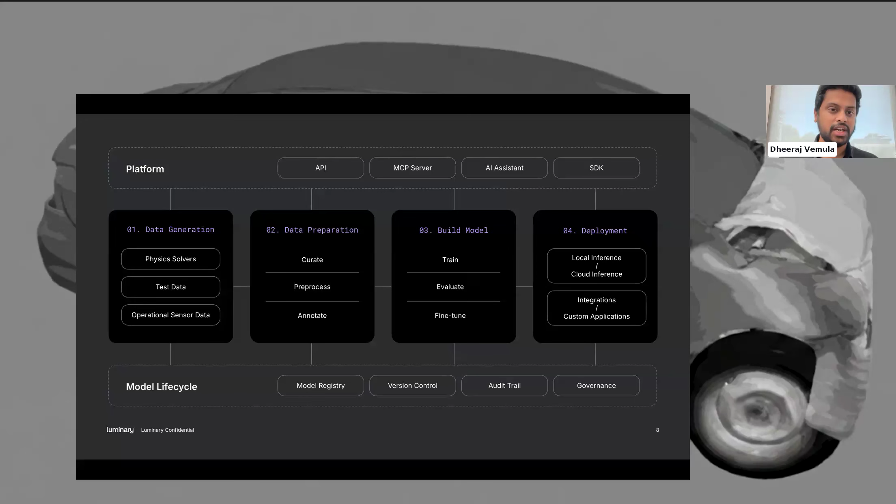So a complete platform that takes physics AI into production, not just a one-off bunch of different scripts tied together, but something that's production grade and ready for your enterprise. With that, I hope you have a good picture of who Luminary is. And now I'll hand it over to Riddhiman to talk about Shift Crash.

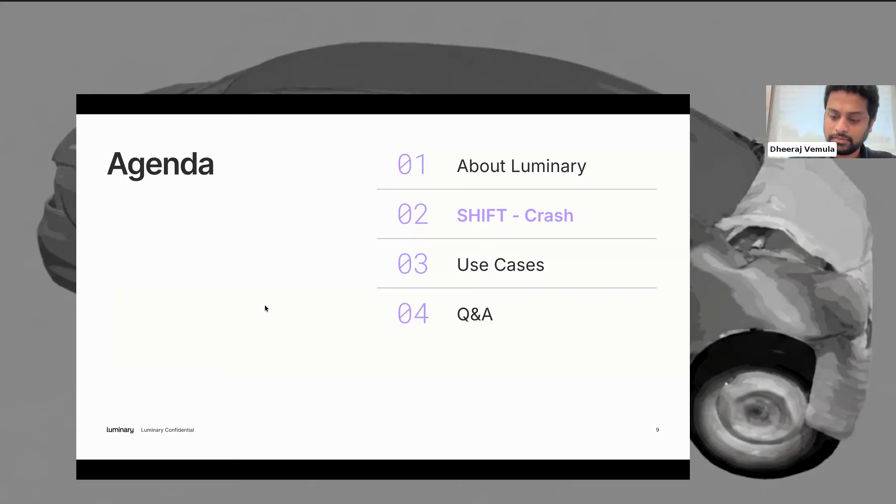All right. So let's dive right into it. We're going to talk about what went into developing this model, what went into developing the data set, and what you would expect to see out of a model like this, the use cases, and so on and so forth. All right, so let's get started.

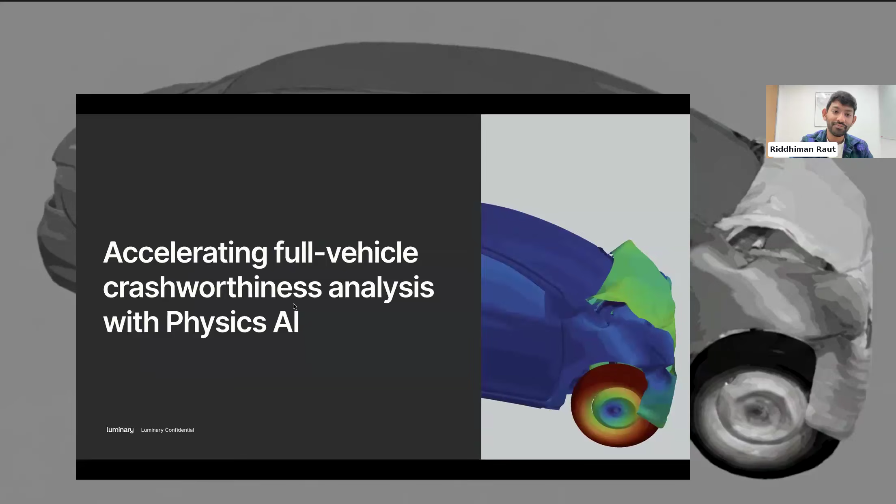So one of the sticking points why we decided to pick up this problem is that crash simulations are expensive across the board, right? Whether you're doing simulations for full vehicles or if you're doing tests, it's a lot of time, it's a lot of compute, it's a lot of money. A single full vehicle crash simulation can take anywhere from around 10 to 12 hours on an HPC cluster. And it's not always just about the runtime itself, right?

It's about a designer or an engineer submitting a job and the job stays in queue for a few days. So by the time you actually get to those results, it might take you 3, 4 days or maybe even a week, right? So speed is of the essence when you are designing a new vehicle for a new vehicle program, for example, and you want feedback for your what if scenarios. What if I make an adjustment here? What if I change the shape of the rails? And if you have to wait a week or even a few days for that feedback, you're losing a lot of time as well as engineer hours.

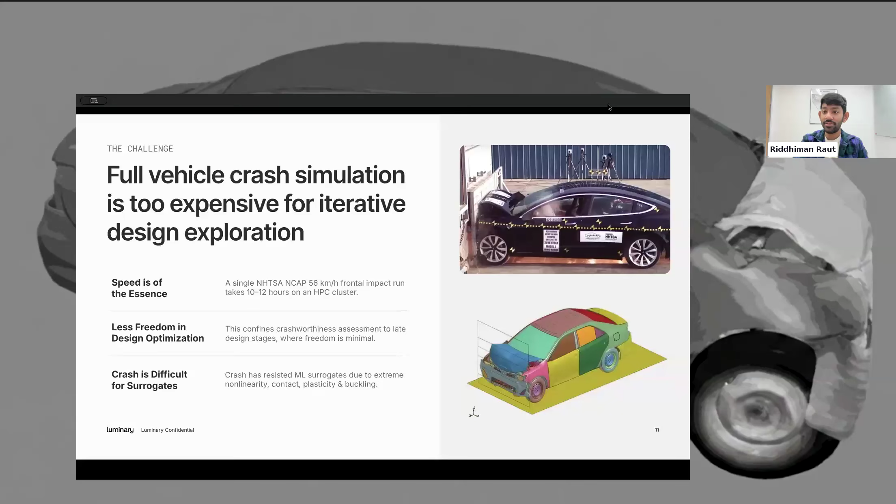This also ties into the fact that once you have made certain changes to your design, you have these design decisions locked in because of the amount of time and expense it takes to compute these. So you have a lot of constraints in your design space. You have less freedom, and finally, when we talk about physics AI at large, we see a lot of applications in external CFD in smoother distributions. Crash is something that is less seen in the literature because of its highly nonlinear and highly localized behavior. And so we wanted to tackle this problem from a nonlinear FEA perspective as well.

So what we have contributed to this body of work is twofold. First, we have provided the largest available crash data set out there. So we have around 5,000 simulations of parameterized geometries, the base model of which is the 2010 Toyota Yaris. And we are looking only at a full frontal crash at 56 kilometers per hour or 35 miles per hour, which is the NHTSA NCAP standardized full frontal crash test format.

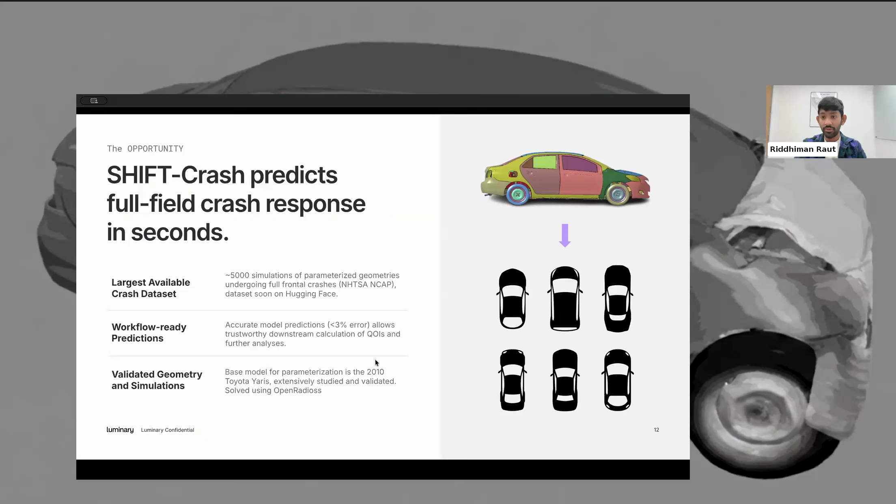The model predictions are workflow ready, and what I mean by that is that the model predictions are accurate enough to treat it as you would treat a simulation output. So if you want to do downstream calculations on top of the model predictions, if you want to do your QOIs and other analysis, you are set for that. And finally, we are using the Toyota Yaris geometry, which is one of the most validated and extensively studied geometries out there. So it gives us a lot of confidence, and we are coming from a position of strength in terms of both the data set and the model.

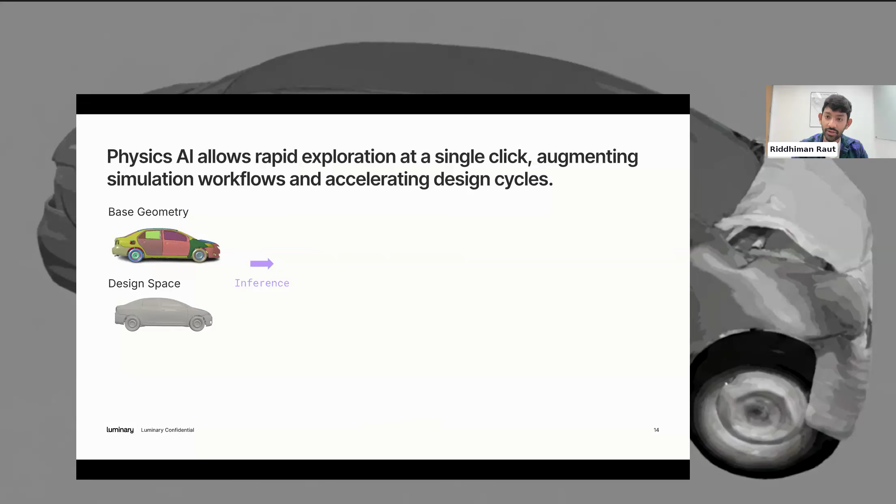So in a physics AI workflow, you would probably be looking at a workflow like this. You will have a base geometry, which in our case is the Toyota Yaris. You would create a parameterized design space out of it by changing, say, some material parameters or some design parameters. And once you click on the inference button for the model, you would ideally expect a full field transient behavior of the car to see how it deforms.

You would also see the von Mises stresses to see how the loads are being transferred over the entire body of the car. And finally, you would want to analyze and generate your own quantities of interest or QOIs. We have looked at firewall intrusion, acceleration, delta V in our case, but you can use your own quantities of interest as you would like.

So the way we look at physics AI is, it's not to replace simulations, but to augment your simulation workflows. So physics AI gives us the opportunity to explore thousands and thousands of designs, thousands and thousands of what if scenarios, and you would be able to down select. You would be able to rank and filter by your quantities of interest.

And once you have a good candidate pool, you now submit your full high fidelity simulations to validate your physics AI predictions. So what this is basically doing is de-risking your actual simulation runs, giving you more bang for money for your compute and for your time.

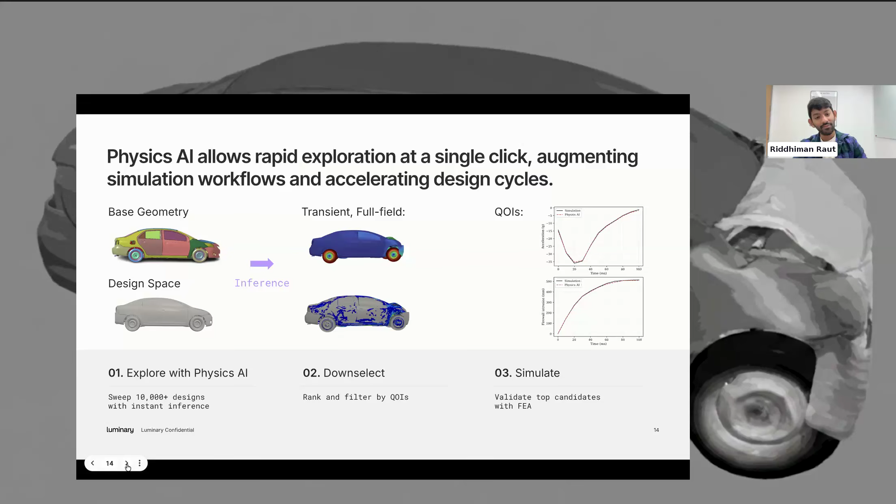So let's talk about the geometry parameterization in this case. We're looking at 4 geometric parameters and 2 thickness and material parameters. The reason for doing this is we want to show that our model responds to changes in materials, changes in sheet metal thickness, but also it generalizes to different kinds of changes in the geometry itself.

So for geometry, we are looking at changing the front crush zone, which absorbs the most amount of energy in a frontal crash, the cabin length, which directly affects the passenger survival, the roof height, which changes how the loads are being transferred onto the passenger cage, as well as the car width, which changes the center of mass.

For thickness, we are changing the thickness of the front rail, which is the most energy absorbing part of the front area of the car during a frontal crash, as well as the material of the front rails, we're going all the way from mild steel to dual phase 600.

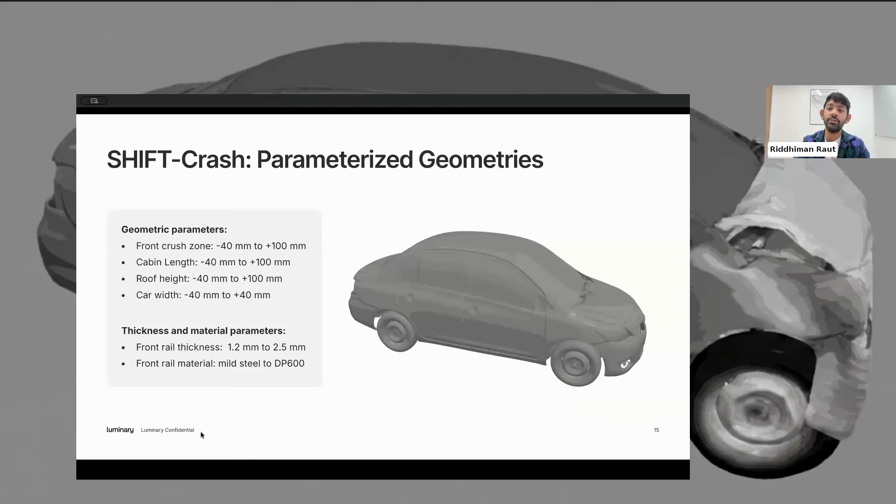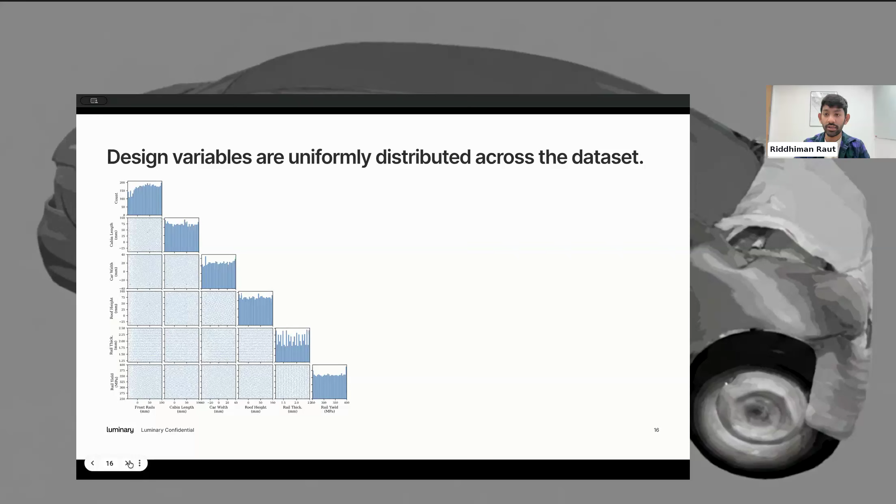The design variables are uniformly distributed across the entirety of the data set. And this is a sanity check for everyone, right? We don't want the design variables to be stuck in a certain corner of the sampling space. We want the variables to be uniformly distributed so that the model learns uniformly and there is no bias involved. The Pearson correlation also shows that changing one variable does not change the other ones, so they are actually independent of one another.

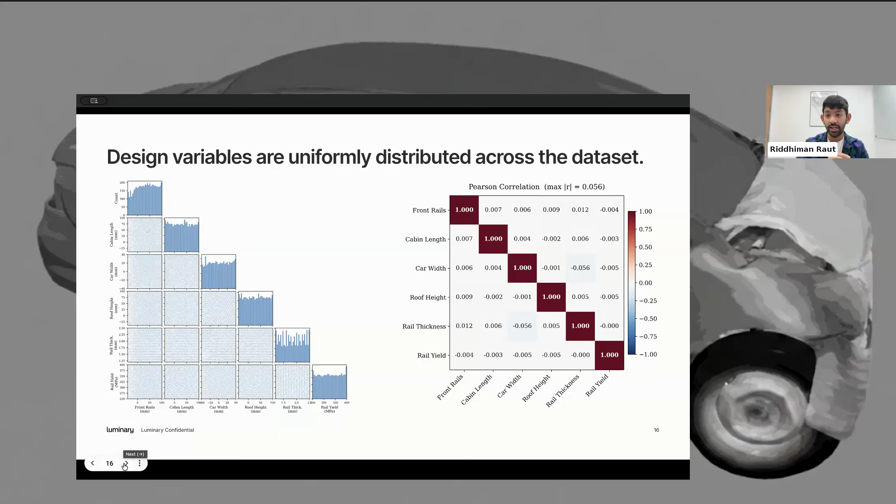The end-to-end workflow for training is something that's pretty standard. So we have 6 design variables, and we have generated about 5,000 variants from that. All simulations are run using OpenRadioss, while the parameterizations were done in ANSA. The simulation time is about 120 milliseconds, which gives us 13 frames at 10 milliseconds each. As discussed earlier, we're looking at 56 kilometers per hour for a full frontal crash.

So once we clean our data set, the outputs are the deformed positions of the car over time, as well as the von Mises stresses. The model is trained using our own version of GeoTransolver. It's pretty lightweight. It fits on one H100. It even fits on one NVIDIA T4.

The model is trained using 1,000 cases, not the entire 5,000 cases of our dataset, but 1,000 cases which are also selected uniformly from the dataset. And this is trained using DDP across 8 GPUs here over 72 hours.

Inference is pretty cheap as well. On an NVIDIA T4, it takes about 50 seconds for the entire temporal output of the model. We are predicting deformation and von Mises stresses, and quantities of interest like firewall intrusion, deceleration, delta V. These are all calculated from the model predictions themselves.

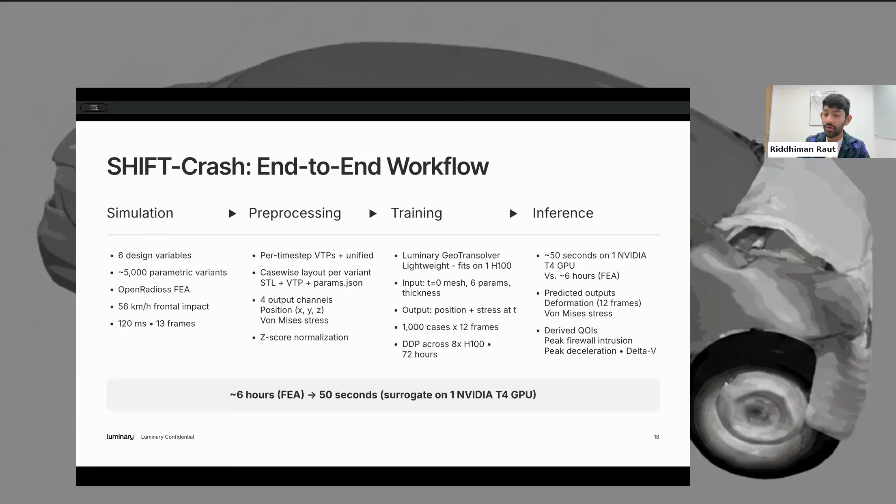All right, enough about the setup. Let's now dive into the exciting part, which is the results. So here's a case that the model has not seen at all before. On the left, you can see the ground truth simulation output from OpenRadioss, and on the right is the model predictions. You can see that they're virtually indistinguishable.

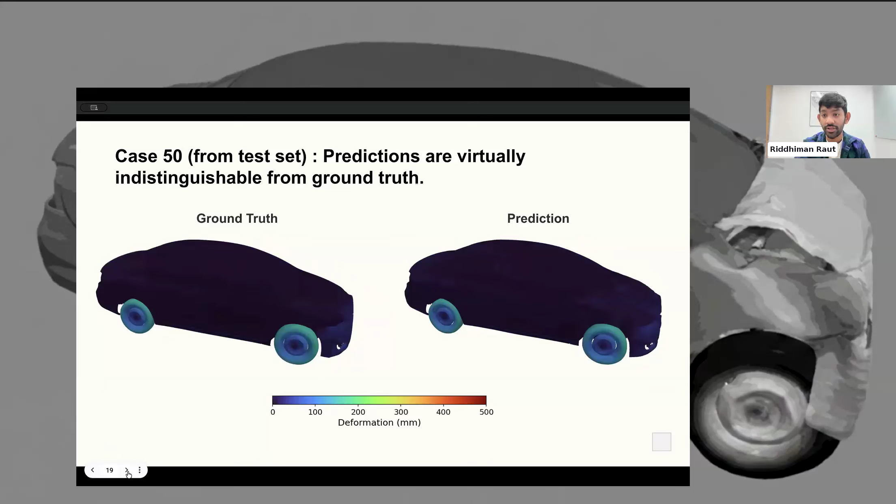And it's not just the outer shell of the car that's deforming, but if you look at the front window, which is getting a little pushed forward, and there's a seat behind, which is also lurching forward. So this is not just the outer shell, but it's the entire car system which is going through deformation and temporal changes, right? And this is exactly what we want to see, right? How the components inside the car are moving around, how the engine is moving around, so if there is any intrusion, it should also happen inside the car as well.

And not just deformations, but we're also predicting the von Mises stress here, where you can see how the loads are being transferred onto the top of the passenger cage. On the right side, we have the error plots. Since most of the behavior is happening in front of the car, we also expect our errors to be accumulated in the front of the car.

The good thing here is that our errors are about 10 to 20 millimeters even in the front, which is quite comparable to our element size of the model, which is about 12 to 16 millimeters. So the model predictions are trustworthy enough.

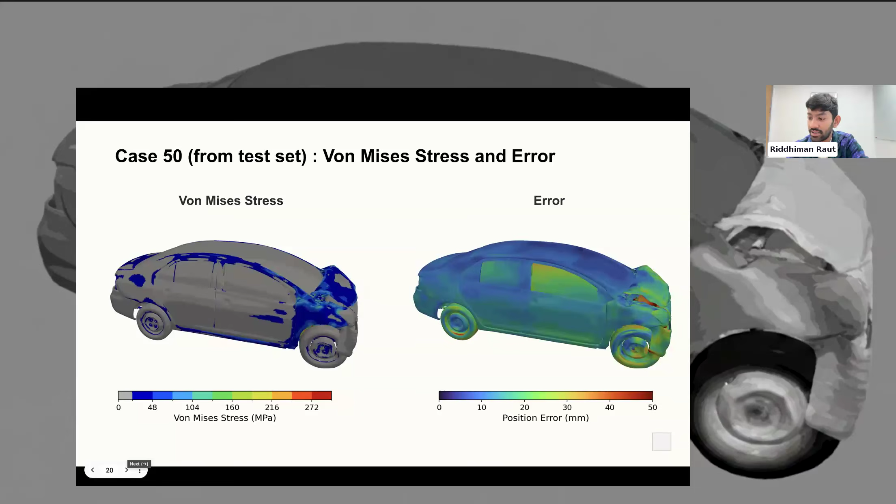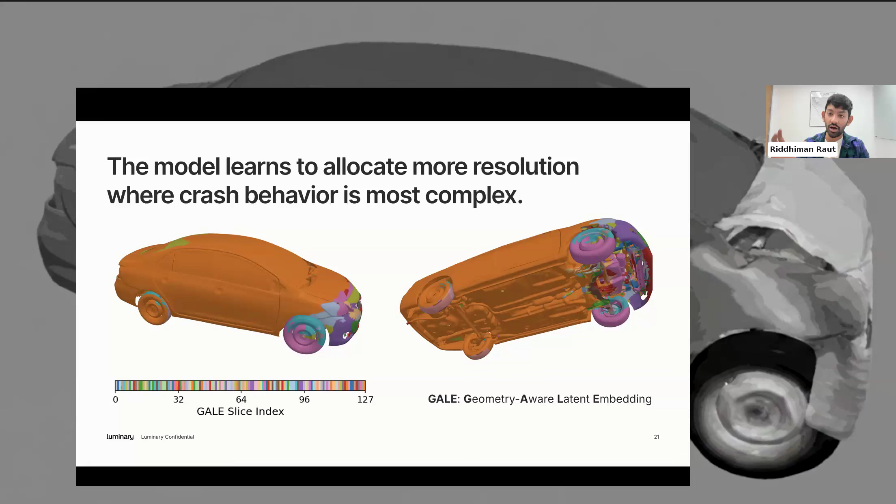I mentioned the model's behavior being trustworthy, and what I mean by that is that we have insights into why the model is learning the things that it is learning. So just to give a brief overview, the model learns to assign slices or point clouds to different regions of a geometry depending on its behavior. So in a frontal crash, we would expect most of the car to not be deformed, right? The back of the car should not be deformed, and this gets one big orange slice.

However, most of the behavior is happening in the front, and there are different modes of crashes, different modes of failure, and the model is learning that by assigning these individual color blobs to different regions of the front of the car. And it's not just the frontal bumper, but also, as you can see on the underside of the car, it's different components inside the car that are getting this specialized treatment.

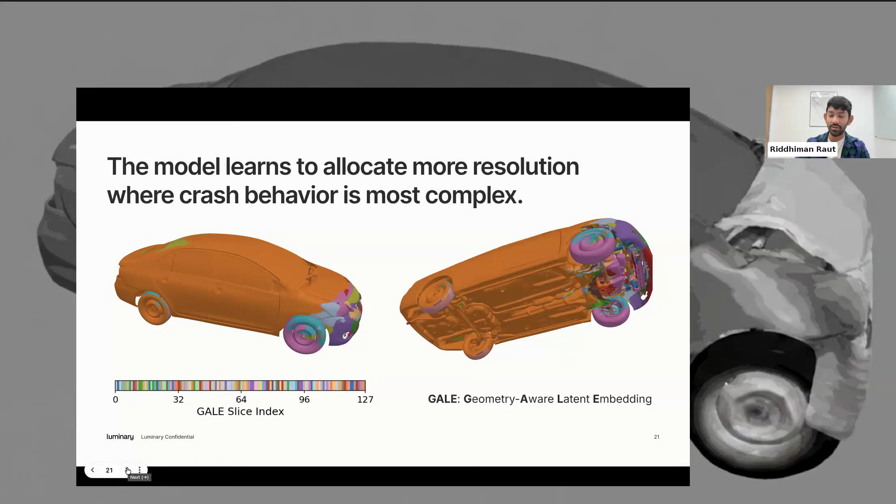And that is how the model is learning the different crash responses without any sort of manual tagging from our side at the component level. The model is learning all of this on its own, and this allows us to trust the model's prediction as something beyond just a random guess.

So now that we have seen the full field behavior, let's talk about the quantities of interest which are calculated directly from the model predictions. So here we are looking at the peak deceleration across three different cases. So the first case is an all min geometry case. So, short front rails, thin rails, low yield strength material. You would definitely expect a more severe crash to happen in this case, and that's also shown in the model, shown in the graph here.

You have the lowest peak acceleration or the highest peak deceleration, which is a proxy for crash severity, and it's also a proxy for head injury criteria. You can see that the peak deceleration calculated from the model is almost a direct overlap of the ones calculated from the simulation data. And across all test cases, we capture it within 3% of simulation data. So we feel pretty good about the model's overall predicting capability.

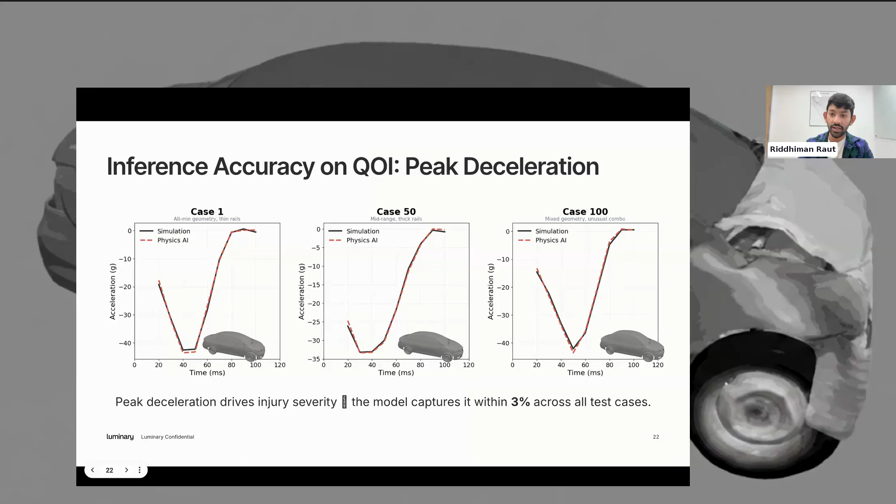You can see that for the other two cases as well, which is a mid-range case and a mixed case, the prediction data is almost on top of the simulation data.

Next up is firewall intrusion. Firewall intrusion, of course, determines the driver's survival when he's sitting in the driver's cage. During a crash event, the engine is going to move in and it's going to intrude through the firewall, and we need to understand how much this intrusion is. For our all min case, actually for all of our cases, you can see that the trend is being captured by the model really, really well. The simulation output is almost completely superimposed by the physics AI output.

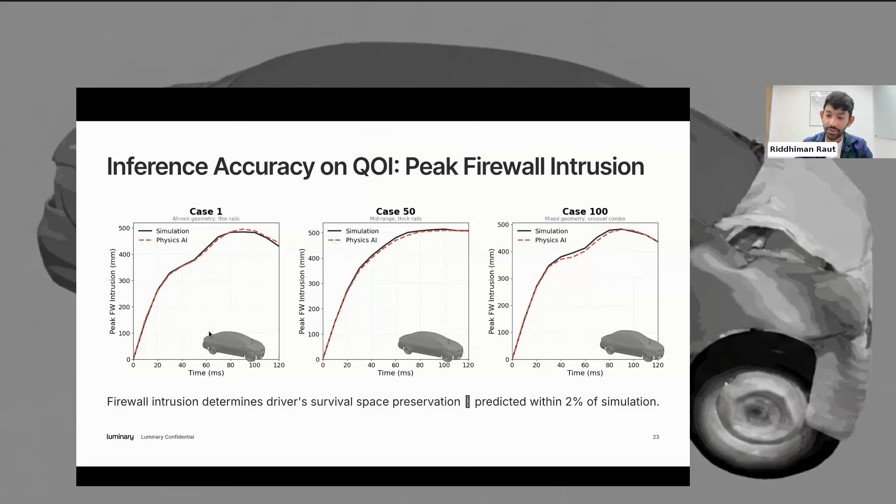And finally, we have delta V. So since crash is a rebound event, when the car is rebounding from the wall, if it has a higher velocity, it means that it has undergone a more severe crash, right? So once again, in the first case, you would expect a higher delta V to account for the severity of crash. You can see that's the case here, and also the model captures the trends across all three cases really well. Throughout our test cases, it calculates delta V within 2% error for all test cases.

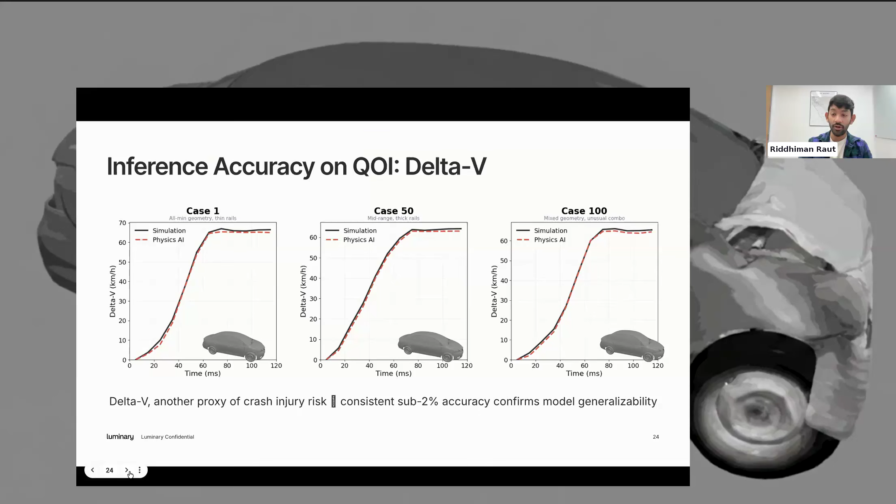And we always get asked this question, how much data is enough data? This really depends on your application, right? If you want a really, really accurate model, then you probably want to feed more data to the model. But if you want directional accuracy, you can get away with a lot less than that, right? And we did this study.

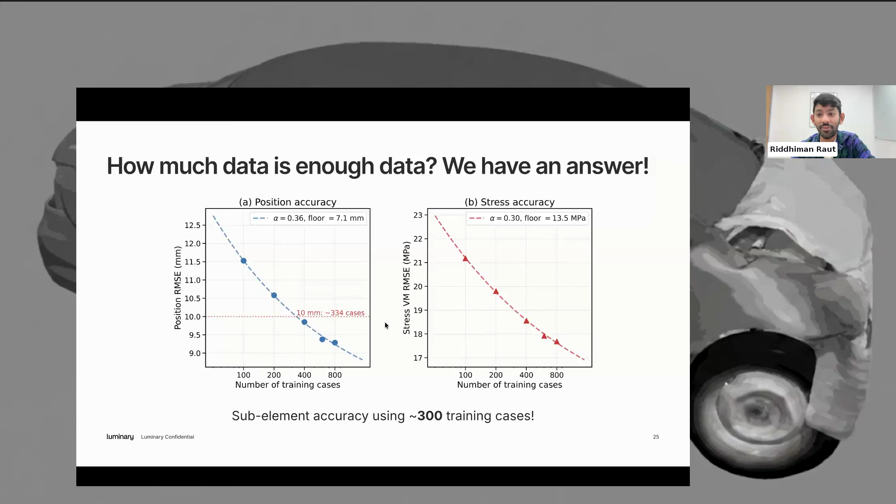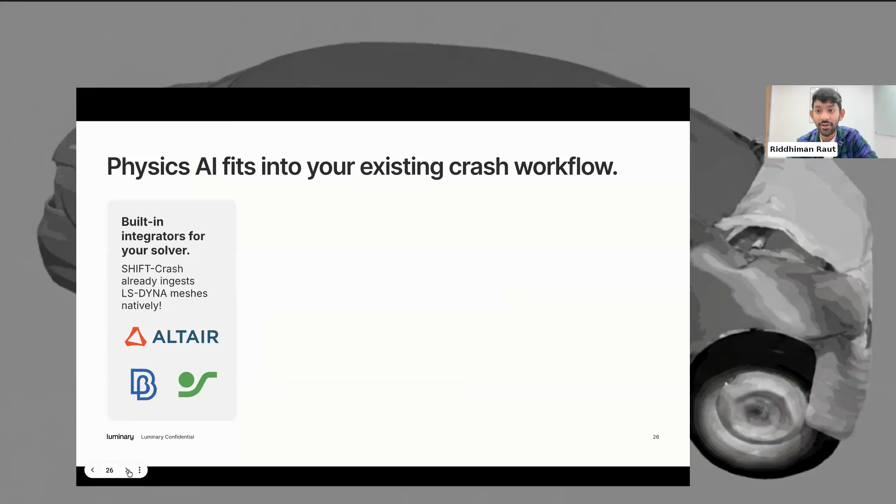So throughout this entire exercise, we have shown that we are able to plug into your workflow pretty seamlessly. If you have LS-DYNA data, if you have Radioss data, or meshes from ANSA, we're able to make use of that right off the bat. We have connectors developed. We're able to ingest that data, train our models on top of it, and there's a lot of scope for improvement of these models as well, right? We want to add dummies into the model to understand head injury criteria, to do seatbelt modeling, airbag modeling, and all of those kinds of things.

We are able to deploy anywhere, as Dheeraj has previously mentioned. We are able to deploy on the cloud, on your private cloud, on-prem, anywhere that you would want to have this capability, and your data does not need to leave your system ever.

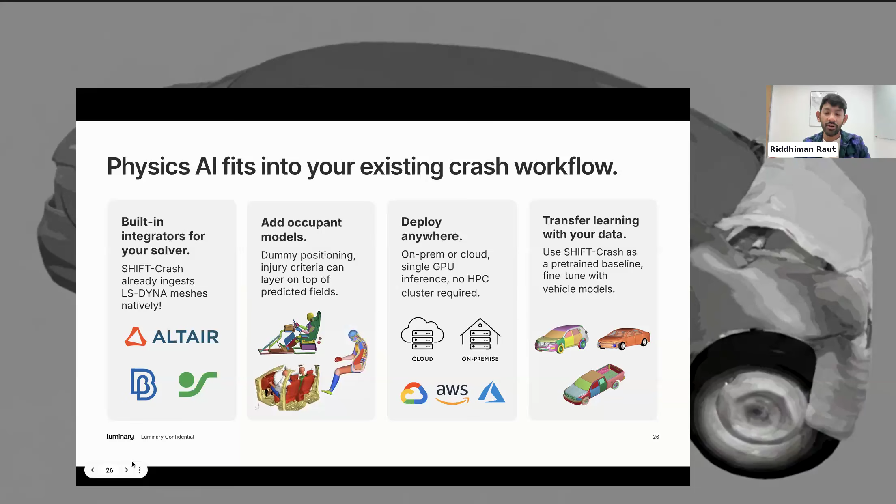And finally, we see this as a very promising direction for transfer learning as well. So imagine you already have a trained model for a particular vehicle program. You want to use that knowledge to transfer to another vehicle program, and you need to generate only a tiny amount of data for your new vehicle, and you can retrain the model to fine tune it onto your new vehicle.

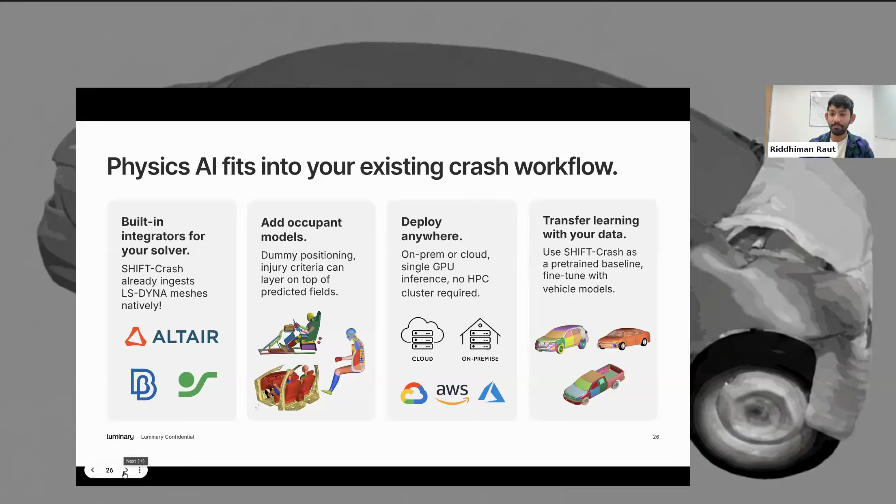Yeah, that's what we had in terms of the model and the data set. Over to you, Dheeraj. Thanks, Riddhiman.

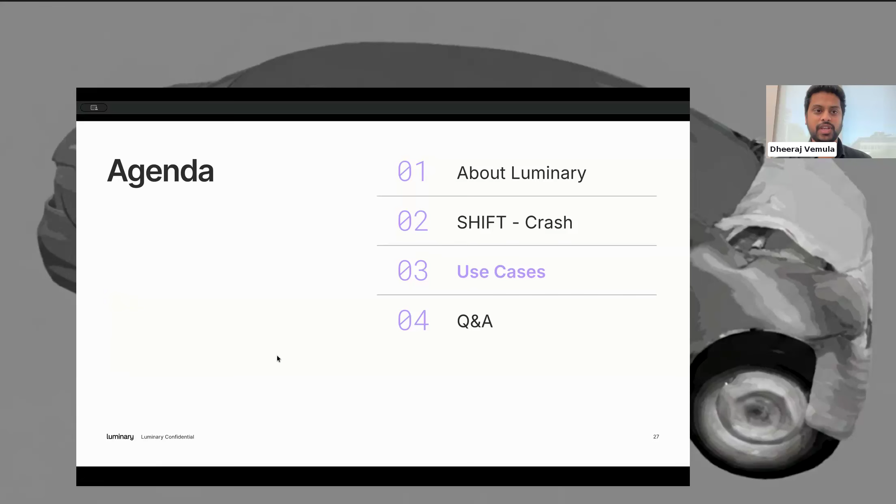Hopefully you got a good idea about what went into building SHIFT-Crash, the first physics AI model for crash simulation, full vehicle crash simulation. Now I want to go into some of the use cases. What I mean by use cases: we often get this question whenever we talk about physics AI with our customers. It's like, yes, I have a fast running model, but now what? How can I use that? What does it actually unlock for me?

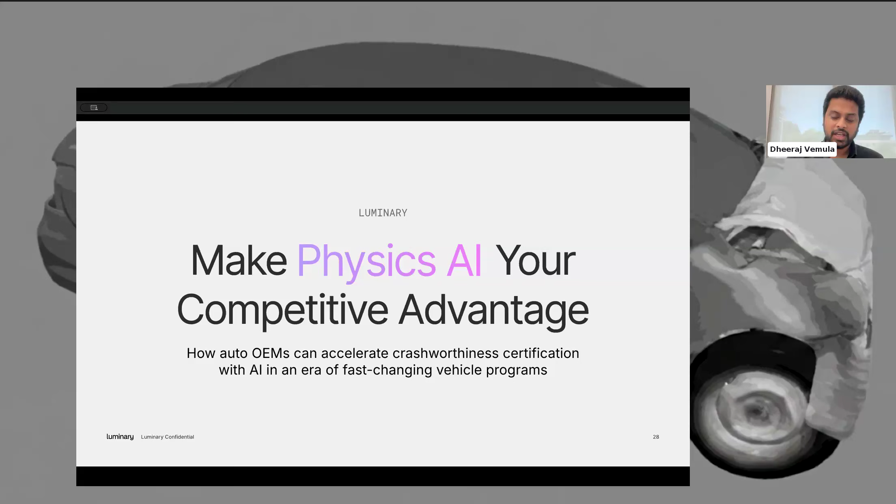So in order to understand that, let's look at some of the challenges, specifically in the automotive industry, that we see today, that we hear from our customers. One is complexity, right? Now, SDV, software-defined vehicles, are increasingly a popular trend. So machines are becoming complex and are being developed at a pace that software is usually developed, which is very different, and a step change for the automotive industry. This doesn't only mean that your development has accelerated super fast. It also means that there are a lot of different connected systems that need to work well with each other.

So the complexity of these multi-physics, multi-domain systems means a lot more validation, and safety has been the biggest bottleneck in validation, because it's the most important thing to get an automobile certified for the road, but it's also the most time-consuming step that occurs much later in your design cycle. It might push something like start of production, some of the metrics that matter for you when you're trying to introduce a new vehicle into the market.

And finally, not having an early understanding of your full system means that there is a large risk of rework much later in the program. If you have to make even a small change before you go into production, that means you need to retool your production plan, you need to do configuration changes, and you have to push out your start of production or time to market. So these are some of the challenges we hear from our customers when they are trying to think of how they can address these challenges. How can we solve this with physics AI?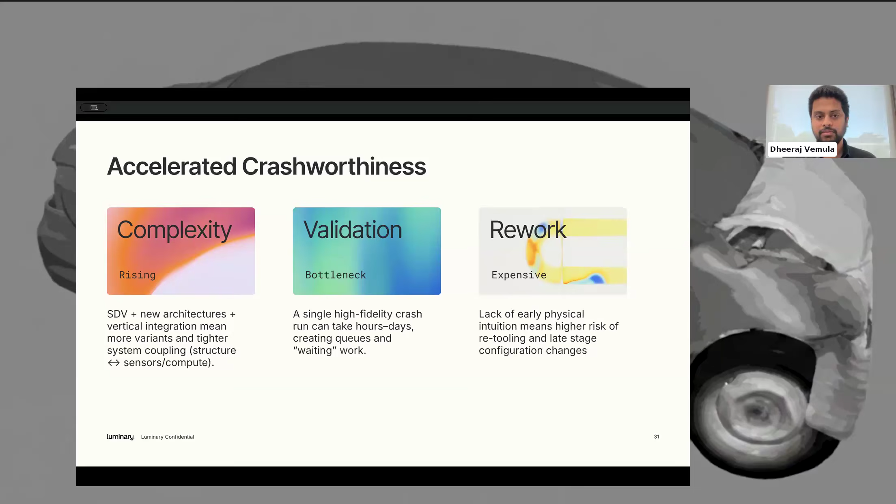So what we want to show is three different use cases that are built based on just one SHIFT-Crash model, but touch different areas of your product development lifecycle. The first one is accelerated crashworthiness through AI model-driven optimization. So as Ridhima talked about already, crash is a very complex simulation with a lot of design variables and a lot of requirements. And creating an optimal design is not a humanly possible task. It needs to be an automated loop. It needs to be a rapid and wide exploratory journey. And it's not a one and done either, right?

Because we see optimization being done at different stages of the vehicle program as the requirements change, your adjacent systems change, your package requirements change, your design requirements change. And often the objectives you're trying to optimize for are conflicting with each other, right? For example, weight and safety are often conflicting trade-offs. You're trying to minimize weight, but if you do that, you increase the risk to safety.

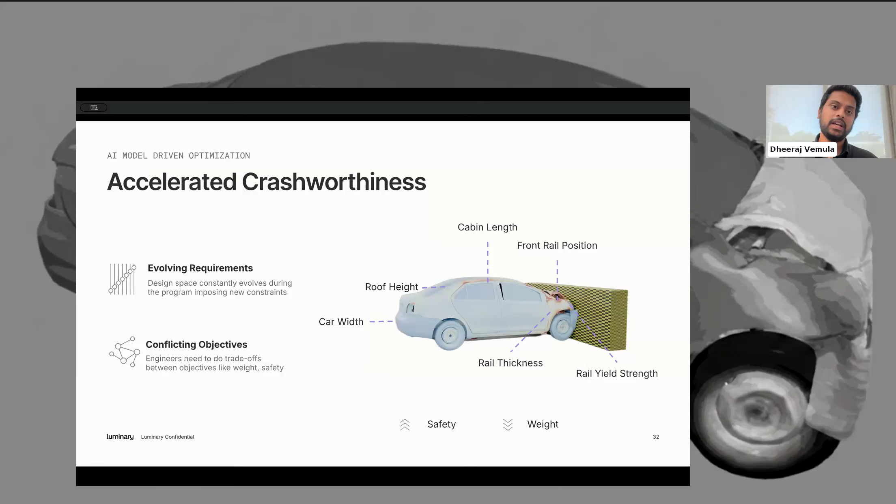So evaluating all of these design combinations for this complex optimization can be hard, and even if you're able to do it in an automated fashion, it can take a lot of time if you're doing a full fidelity simulation. That's why physics AI has an advantage. You can rapidly explore thousands of designs within an instant using physics AI. So I will now switch to a demo to show our optimization dashboard.

While I do that, I want to also say this about optimization. As I mentioned earlier, this is not meant to reinvent your workflow, but you can build the optimization into your workflows through the API SDKs.

Hold on a second. I'm having a bit of an IT issue. Let me share... a minute. Yeah.

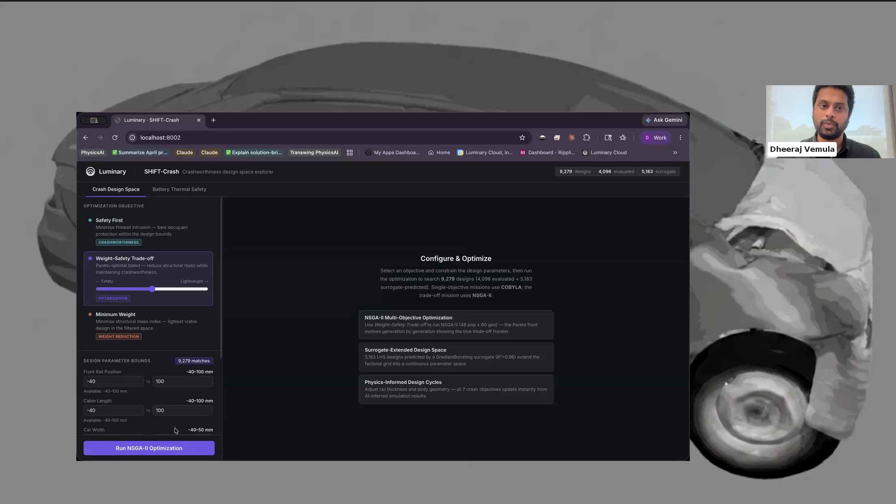Okay. So here's an example of how optimization might look, right? And like I said, this doesn't have to be your solution. Let's say you're using your own optimizer like an Esteco tool or optiSLang. You can easily integrate the physics AI model into your optimization tool. But just to demonstrate the idea, let's say you're trying to optimize for both weight and safety. You're trying to do a trade-off study.

You can run a multi-objective optimization using an algorithm like NSGA, a genetic algorithm, evaluate thousands of designs really fast, and not just get one optimal design, but have a Pareto front that you can choose from. It gives information about how your key metrics are and what your design looks like, right?

And you might just as well do different types of optimization. Maybe you're not doing the multi-objective study, maybe you're just trying to minimize weight early in the program. So you can do that too. So the idea is you can do multiple optimizations through the model. Once you have the model ready, you can do multiple optimizations as many times as you want. So that's the value in optimization.

If you're doing one-off optimizations, it might be easier just to do the full fidelity simulation. But assuming you are going to do this as your program requirements change, as your design changes, the reusability of the physics AI model is really strong.

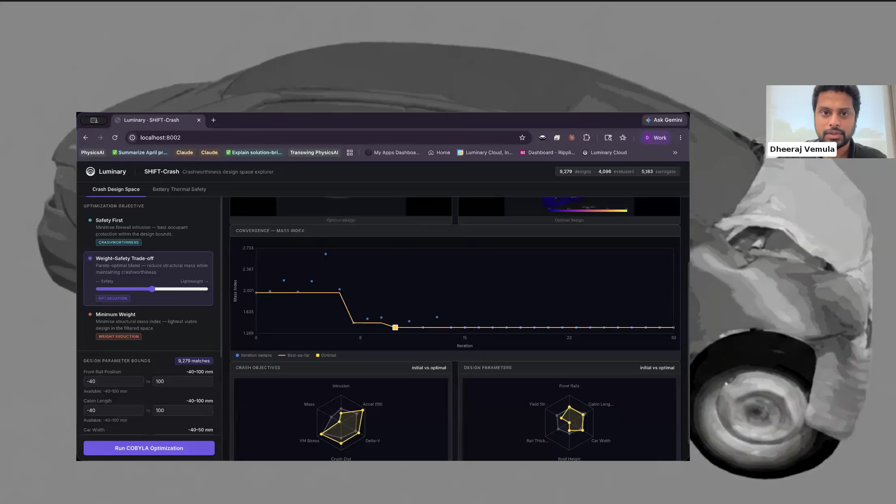Let me switch back to the slides. Sorry, I'm having an issue with Zoom today, but you should be able to. Okay. Okay.

The next use case is a physics-informed design studio. And this goes into this idea of left shifting your design freeze, right? One of the common challenges we hear from our customers is that there is a big disconnect between designers and analysts. They don't speak the same language, they operate at different speeds, which means they're in different silos, unable to understand each other's intentions and each other's requirements.

So, what traditionally happens is a designer comes up with a bunch of designs, then they throw it over the fence to your analyst, then they analyze the designs, they find out which ones meet their requirements, and then they go back to the designer. There's a whole manual iterative process which can take weeks if not months.

But what the physics AI informed studio enables is having that physics feedback right in your design studio environment. You don't need to go to the analyst when you make small design changes. You can evaluate the performance of your design right in your design studio. And maybe you come up with a smaller set of finalized designs that are more performant, closer to your design requirements, and move them to the analyst so that they can analyze the final set of designs and come to the optimal design.

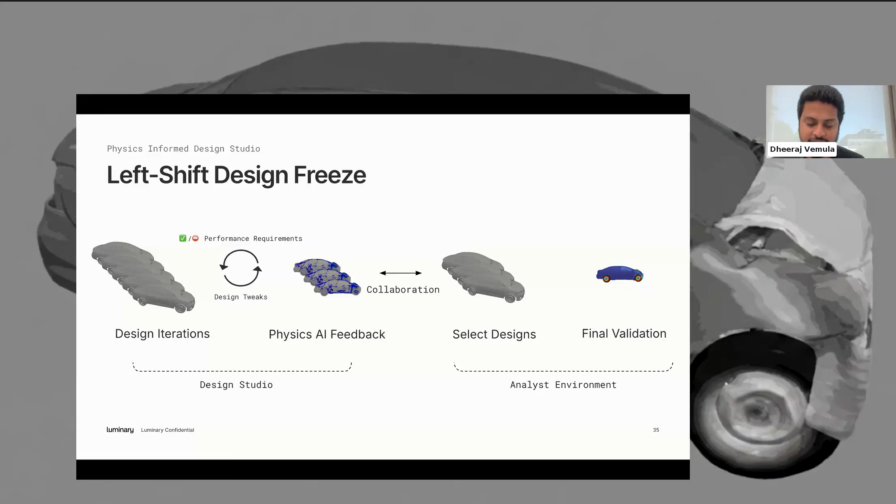So this not only is more collaborative, it also means less rework, less time to come to the final optimal design that both the designer and analyst can agree on. Now I want to show a quick demo of how this looks.

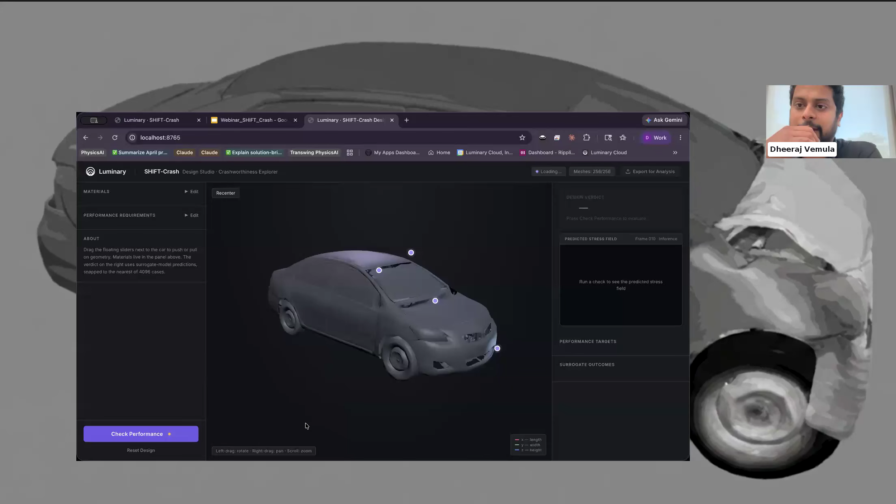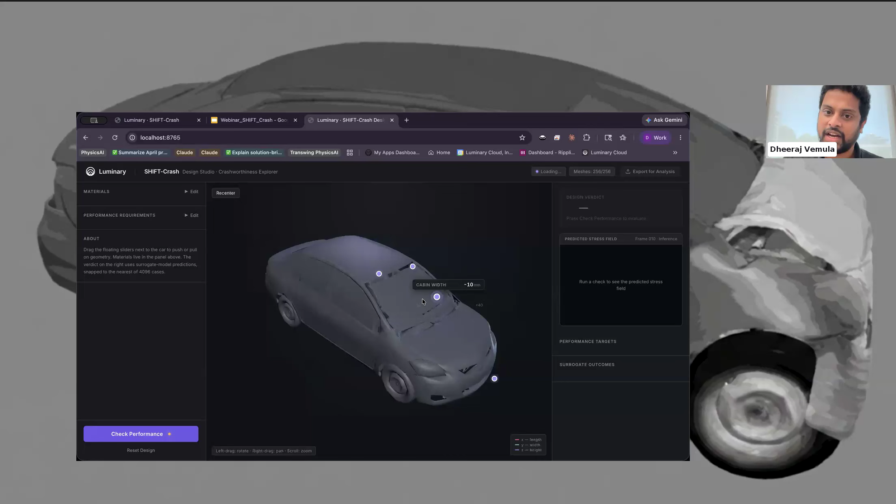Okay, so we are in the physics-informed design studio. Again, this is our environment, but you don't have to do your design in our environment. This can just as easily be in an environment that you're used to designing in, for example, Blender. So you're a designer, you're trying to make some tweaks to the design, adjust the parameters, and at this point, normally what you would do is pass the design back to the analyst to understand how the design changes your crash performance.

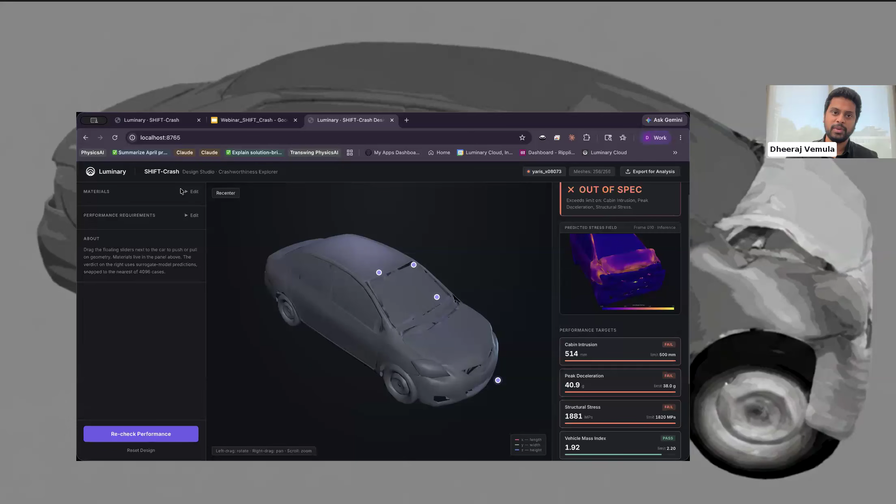Instead, in a physics-informed design studio, the physics AI model runs in the background on the new design that you've created and tells you instantly what the impact of that design is. You're a designer, you don't care about the stress field, but you want to know whether it's within the spec of your performance requirements or not. So it gives you a breakdown of where it's not meeting the requirements, and you can quickly adjust some of the parameters. There is a material selection available, so you can adjust those parameters and see how that impacts the design.

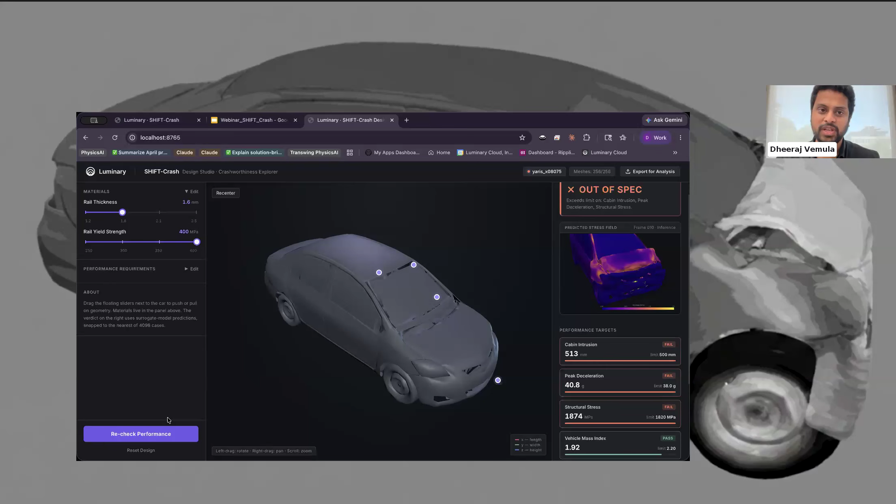So this enables fast physics feedback that can help you come up with better designs easily, and not just as a designer in your day to day, but this also improves collaboration because a designer and an analyst can get into one room immediately and do a design validation study. They can quickly change the designs, understand what the impact is, and come to a quick design as opposed to waiting for a full fidelity simulation that takes weeks to run. So that's the design studio.

Are you seeing the presentation now?

And then the next use case is multiphysics systems for battery thermal runaway. So there are increasingly complex vehicle architectures where different systems are connected together, right? And one of the things we've looked at is how crash impacts thermal safety. Battery runaway is a big safety concern for EVs, where any cell intrusion can lead to potential thermal runaway, which can be catastrophic.

This again, like the designer analyst problem, has been looked at in a siloed, separate way. So a battery analyst would look at the thermal runaway, a crash analyst would look at crash. They're in their own siloed development, but they're not talking to each other. The systems are not connected to each other, whereas in real life they are one single system with connectedness throughout.

The challenge with looking at these siloed systems is that you end up over-designing your car, making it heavier, less range, less performance. But with physics AI, now you can move to a coupled crash thermal runaway, where the crash system's outputs are connected to your thermal runaway simulation. For now, we will show a one-way coupling, but you can do a two-way coupling too. What that enables is it's gonna reduce your thermal runaway risk because there is the transient aspect of the crash simulation. You have the time component now available to you, as opposed to just saying this much intrusion is bad. So you can plan your fire suppression strategies given the time to thermal runaway risk, and identify critical intrusion depths, etc. What it unlocks for a vehicle program is an optimized design that is safer and lighter.

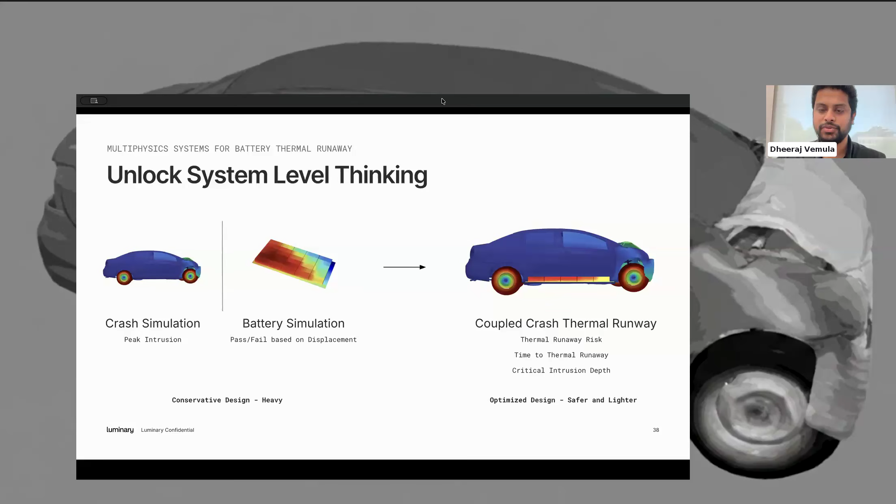Now let me jump to the crash thermal runaway demo.

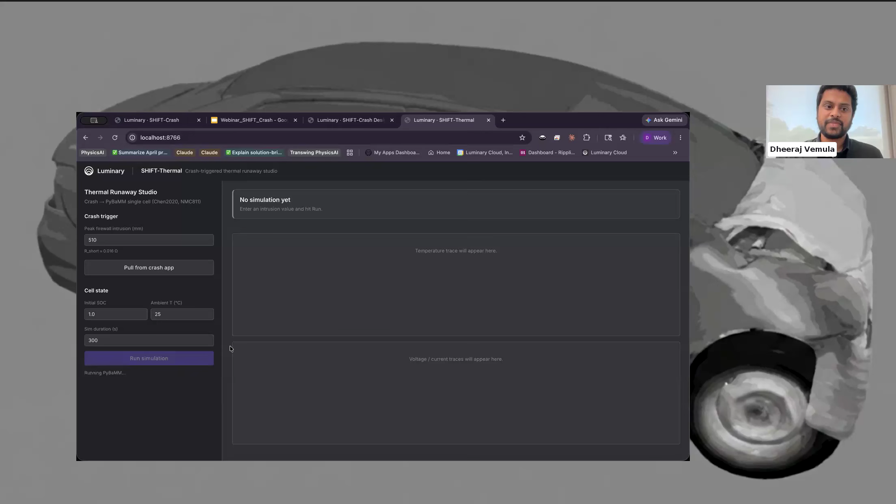So this demo is using an open source Python library for demonstrating the thermal runaway. PyBaMM is a popular library that models cell chemistry and everything. So the crash results, we are using the peak firewall intrusion as a proxy for the thermal runaway simulation. In real world, you can get into the cell intrusion level also from the crash simulation. You can look at side impact — that's one of the most critical types of abuse scenarios for thermal runaway for an EV. So there are different things you can look at, but as a proxy to demonstrate the idea, we are showing you here the peak firewall intrusion as a proxy.

The value for the peak firewall intrusion is pulled from the Design Studio app. You then run the simulation, and this is a fast, lightweight model, so it runs immediately and tells you the risk of thermal runaway. You can check different intrusion values — run, let's say, a lower firewall intrusion, and see that results in a stable cell.

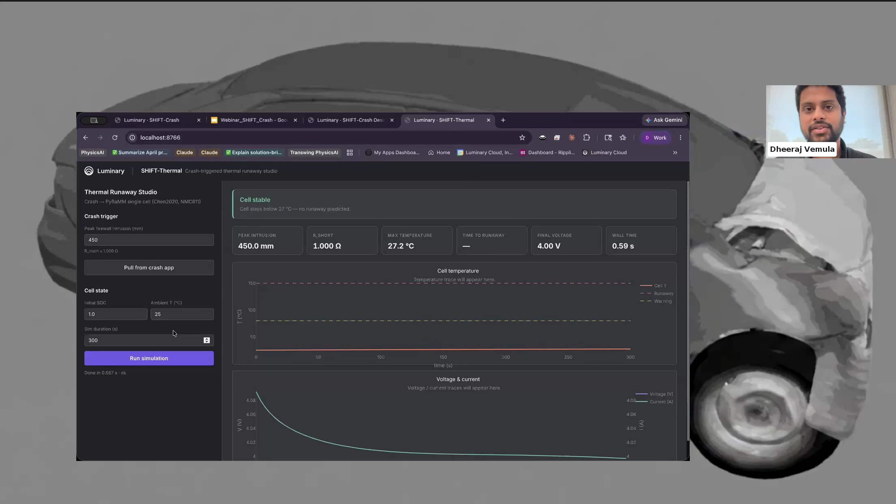So you can do more connected multi-physics systems level outlook using a physics AI model. Absent of a physics AI model, every time a design changes, you'd have to go back to a mesh, go back to solving it and waiting, whereas these simulations, as you can see, are at different scales, different speeds, etc. So that's the final use case.

I wanted to show some of the future work we are focusing on for Shift Crash. I'll maybe let Ridhiman talk about this.

Thank you, Dheeraj. Yeah, I think first of all, thank you for the demos. That paints a really nice picture of how this can be utilized in different kinds of workflows. And we want to support more, we want to push the boundaries, we want to keep pushing on boundaries with our crash work.

One of the things we are really interested to bring into our portfolio of predictions is effective plastic strain. We have heard that whenever crash engineers are looking at crash models, they are interested to learn where a material fails, where a material yields, and so plastic strain seems quite important to understand material failure inside the model. So that's one thing we are actively working on right now.

We are also introducing principal stress components, so that gives not just the von Mises stress, but the entire stress matrix to the hands of the principal design engineer, to make more informed decisions on the structural loads on the car and basing design decisions on top of that.

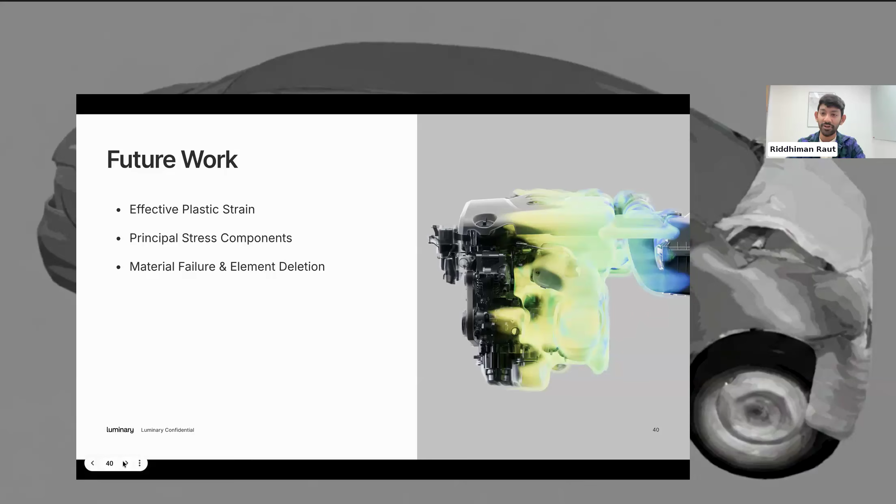So, those are the kind of things that we want to add in the near term to our crash model, with a bunch of future work that we are also thinking of, for example, spot weld failures and all those kind of things. So we are excited about what we can bring down the line.

So in summary, I think we were able to show that crashworthiness is a difficult problem, but physics AI is ready for it. We have our models to show that. We are able to show that at a production level, not just in a one-off scale. We are able to get sub-element accuracy with relatively little data, and of course the accuracy that you would need depends on your use case, and the data should scale according to that.

Field predictions are accurate enough to use for downstream calculations. You would treat them just as you would treat your simulation data. So once again, you don't need to change your workflows at all.

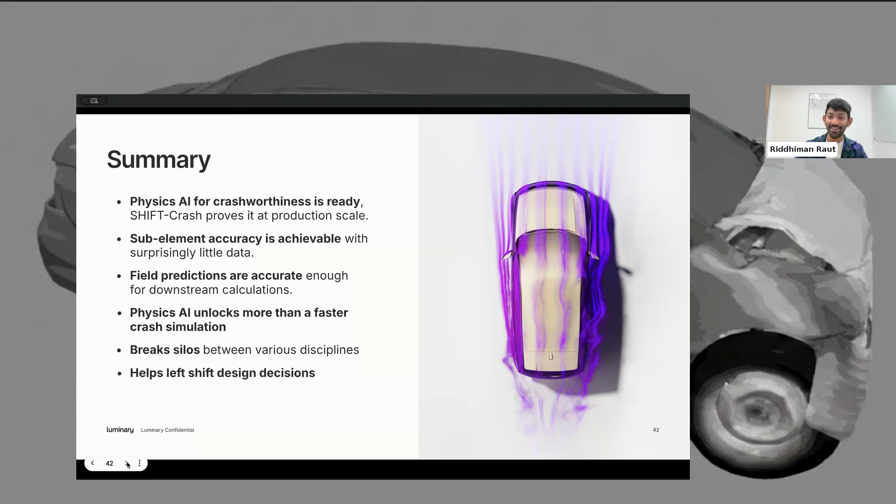We are looking at faster design decisions based on your what-if scenarios. We are talking about introducing more collaboration between teams that maybe did not have as linked collaborations before. And we want to left-shift the entire design decisions to account for more collaborative design development. And maybe we want to see more beautiful designs. We want to see more collaboration, more understanding about the entire field, and that helps us grow, helps all of us grow.

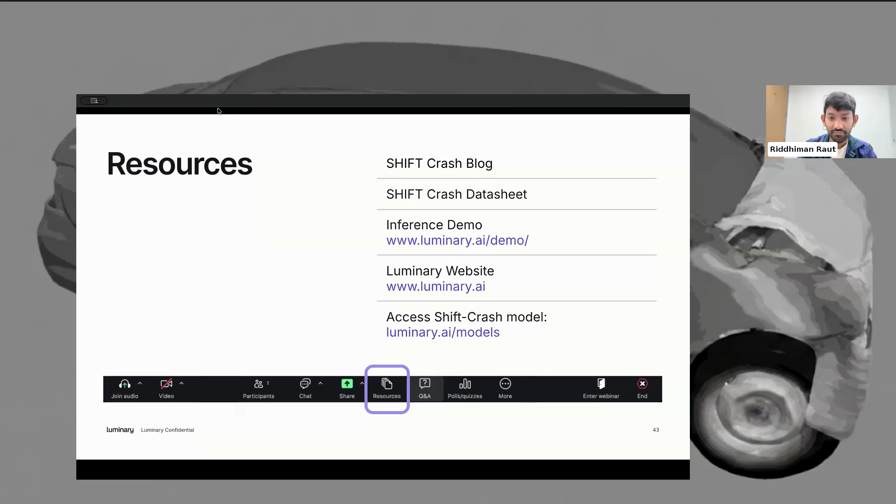Along with the dataset of 5,000 samples, are there any scenarios to understand and learn about the physics so the model is good? That's a solid question, and that's part of our roadmap as well with Shift Crash. For this particular case, we wanted to take the NHTSA frontal crash scenario, but we are augmenting our dataset as we speak with pole crashes, with side impact crashes. That should give the model an even broader sense of different kinds of crash scenarios - maybe 40% overlap is one of them. So we are looking at creating a much larger dataset with all of these crash scenarios involved, and we are hopeful that the model is going to generalize well to different kinds of physics scenarios. Okay, I think that's the last question.